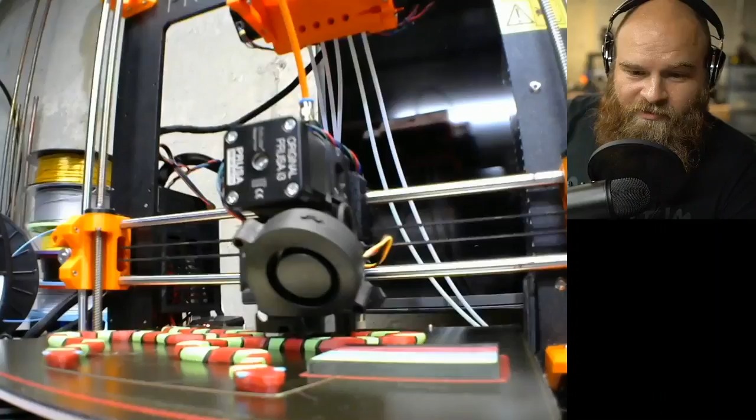So like, I want to be able to transition. I don't know if that pops up, but I just hit a transition and I got a camera on the MMU2, so we can take a look at what's going on over there.

And I got my little mini camera of myself. Let me watch that live. Hopefully my volume is turned off because I don't want to hear myself in this cycle. So let's wait for my internet to catch up here. Oh, it's working? Sweet. And was the transition okay?

I can't, OBS does not show me the transitions whatsoever. So when I click transition, it just is a cut. But I have a fade set, so hopefully it faded. That would be amazing if it did. Ah, sweet, it was smooth. Sweet. So let me go back to just me.

Rogue Dude, I can't wait for my actual one that I ordered. That way I don't have to just keep testing it. I feel with the one that I got for beta testing, I just have to continue testing. So I haven't really printed anything for fun. So I'm just testing different filaments to see which ones work the best.

I still need to raise my laptop or lower the camera so I'm looking at the camera more. I hate staring at my monitor because there's no monitor arm. You know, that's what I'll get. I'll pick up a monitor arm. That way...

Yeah, October, dude, that's next month. That's Halloween. That's a month away from my birthday. So I like October, mostly because Halloween. I'm a huge Halloween junkie.

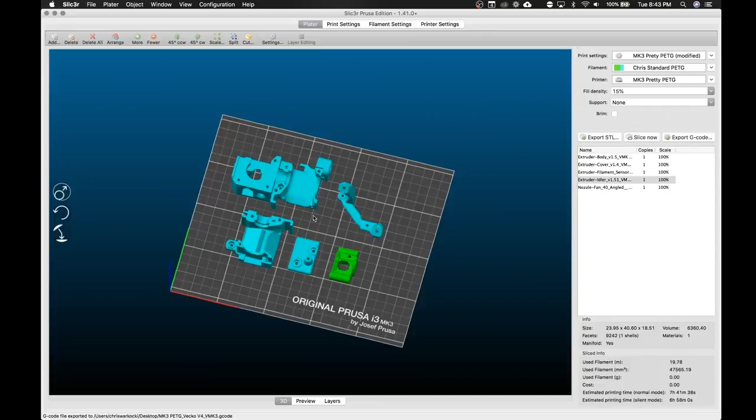Can everyone see Slic3r right now? Of course I can't see chat. Ugh, the things that happen.

I just finished slicing. These are some new Vecko parts. Do I have the new Vecko, or do we have to go on...

Oh man, so I guess I got to go here, and I got to go to Facebook, and pull up my chat with Vecko. Y'all get to follow along as I... did I get any notifications?

Let's see here. While I'm waiting, I need to learn how to convert STLs to 3MFs. So Bruce, if you pop in, you don't need to make them into 3MFs. 3MFs is just a format that allows you to save settings, which is awesome. That's something a lot of programs don't have. We'll go over that because that's actually really powerful for Slic3r.

But oh, that's what I was doing. I was gonna find my chat with Vecko. He sent me parts, Vecko. Hopefully nothing naughty is in this chat. So he made me this. I have to download. Thank you, Vecko, by the way.

Yeah, it can't be previewed. Download. Give me download, direct download. Okay, and I think I have everything else. Do I have the other Vecko files on here?

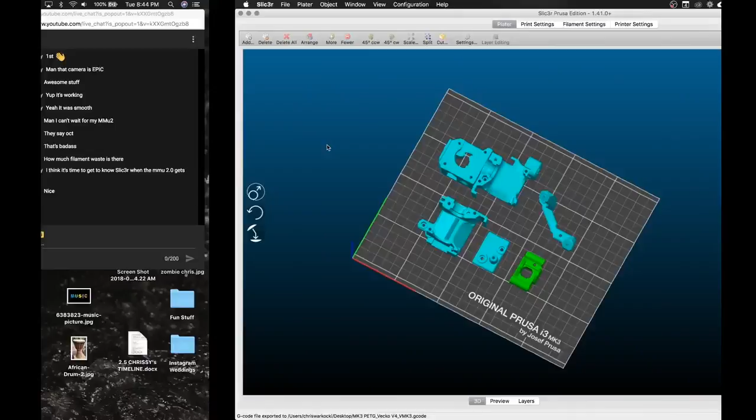Revised extruder and X carriage, yes I have that. So let's go back to Slic3r here real quick. I'm gonna check the chat. Yep, back. Get off that YouTube, get off that Facebook, Chris.

But I had to download those files. So let's delete this bed. I already have my PETG profile loaded. Oh, he sent it to me as a step file.

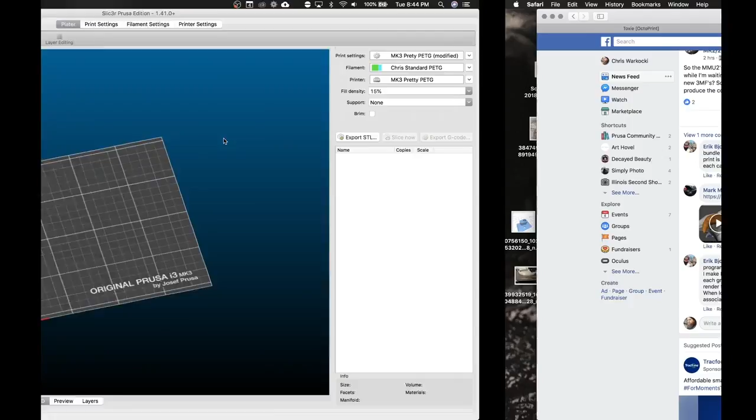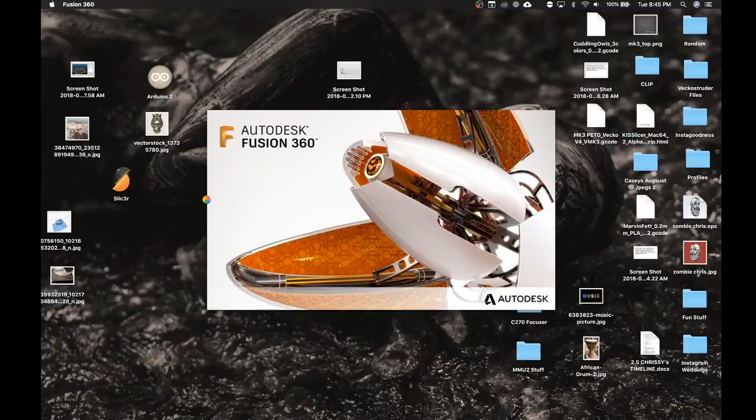Okay, let's open up Fusion 360. Oh, of course that doesn't work. Load Fusion 360. And let's do some stuff. Let's go Fusion, we're really going to do this slow. I'm going to show you how to convert a step into an STL, and then how to load that STL into Slic3r for no reason.

And I can't see chat right now, so if you're asking me questions, I apologize if I can't answer them. I will be adding an extra monitor to this setup here shortly. I'll run to Best Buy tomorrow and add a monitor to this, so that way I'm not running on...

Well, I guess I could put an iMac down here, that way I have a bigger screen. No, Chris, stop buying things you don't need. You don't need another computer down here. You just need to... let's see here.

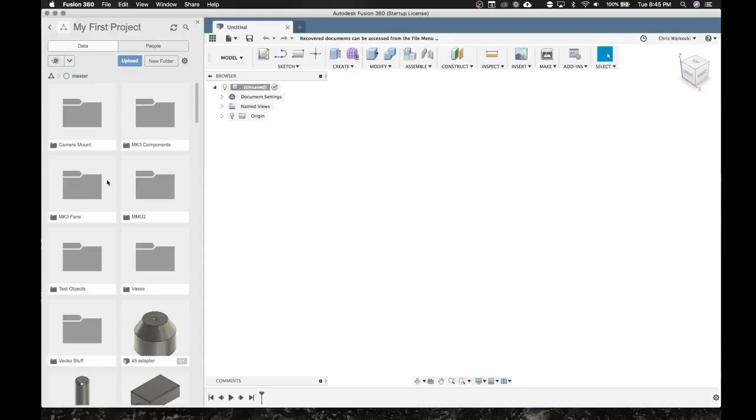Vecko stuff, so upload, select files. Hopefully I don't have anything naughty in my downloads. I don't. Let's see here. Extruder step. Open, upload.

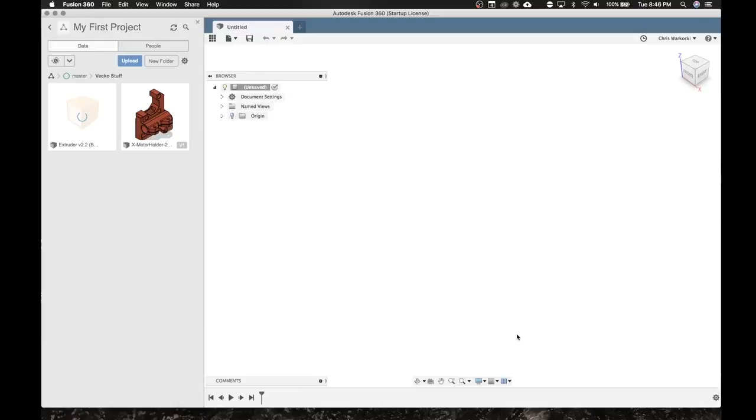And this takes just a quick second while it reads that step file. Go, step file, go.

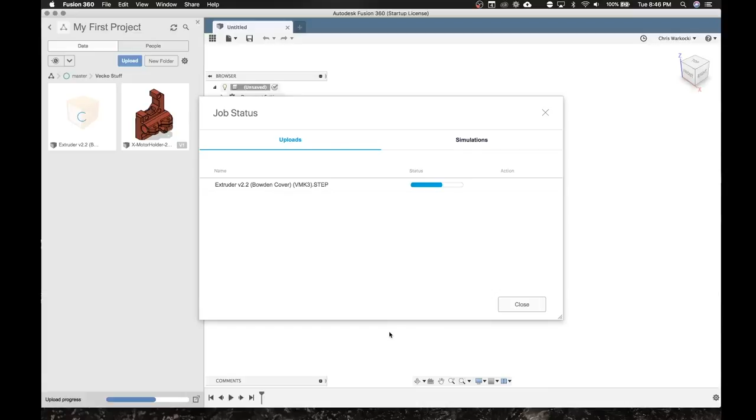I can actually, you know what, I can put an iPad down here, get a little monitor for that. Come on, why is this taking so long?

I'm gonna go look at the chat while that's doing that. Chat, oh man, no one's saying anything. Hi chat people, everyone's so intently watching my step conversion.

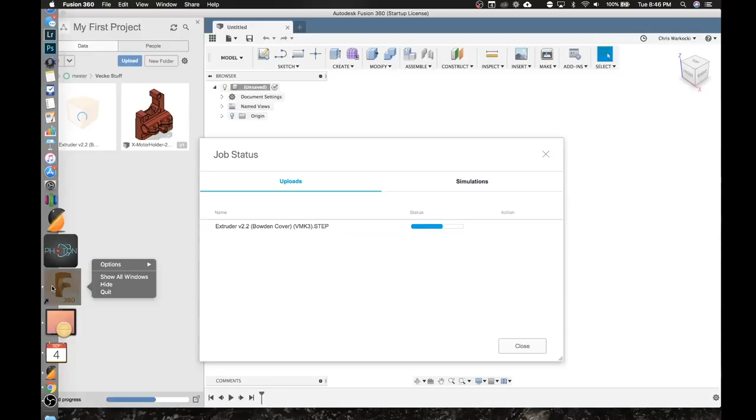What, are you crashing? Let me find out. Fusion, nope, hasn't crashed, just taking forever. Vecko, send me STLs bro. I'll load the rest in here.

So let's load the rest of the files I need in here. Revised carriage files, open in Finder. There we go, yep, come here.

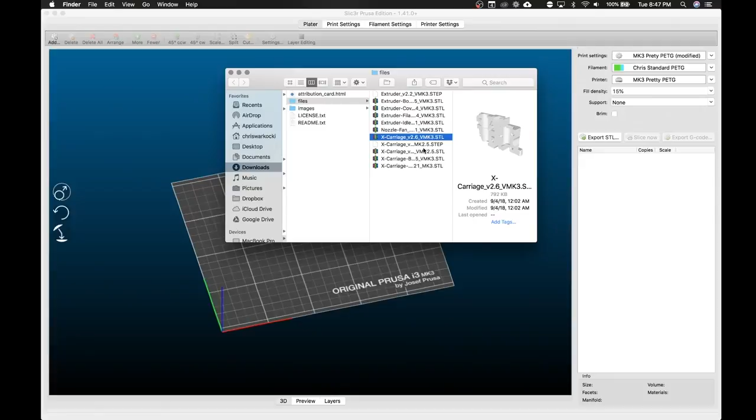So I need the carriage parts, I need to print these. So there's the carriage for the Mark III, and the back and the cable holder. I need those three, so this, and this. Drag that into here.

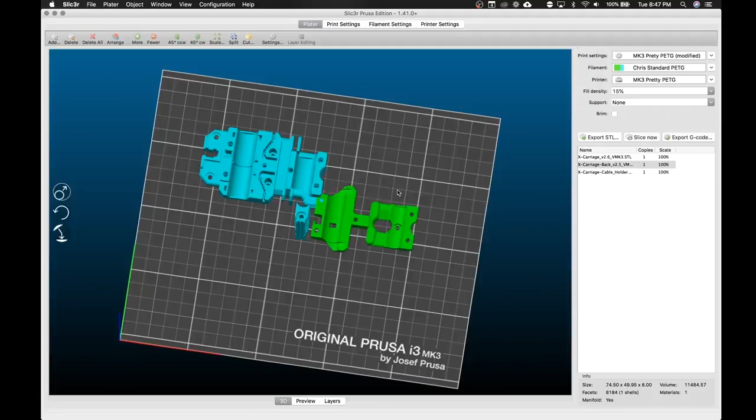Arrange, oh I love that they fixed arrange, it's no longer dumb. So I will do some changes though. By the way, the L and R keys are your rotate left and rotate right. L is left, R is right, in case you wanted to know which is which. I'll shove you over here.

Someone's texting me, my watch is going off. How's that? What is going on?

That step conversion is taking way too long. Is there an error with the step file? Extruder 2 step, open. Upload.

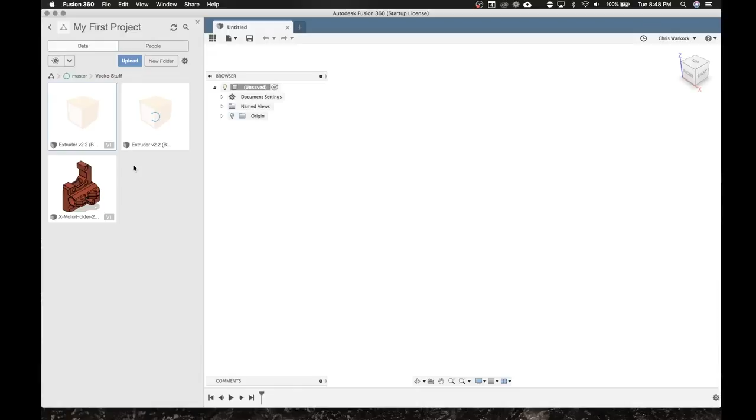No, that one stopped, that one finished. All right, let's see if it loaded. Opening document. And there's nothing here yet. It's probably mad at me because I'm loading too.

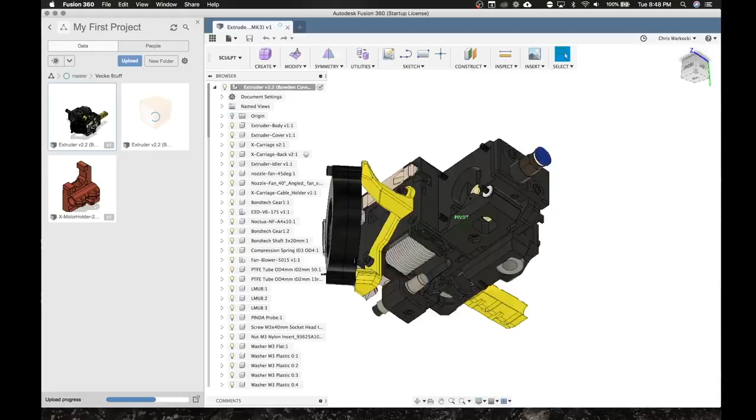You guys are probably laughing at me like, all right. Oh, that's why it took so long. This is the full, you didn't just send me the step for the thing, you sent me the step for the whole thing. By the way, Vecko is insane.

He does everything in SolidWorks. This is the entire thing in step, everything. He does, well, I don't see the motor, normally the motor's in here too, like it didn't load the motor. But this is what I want. Filament sensor cover, is that it? Yep, that's the one I want.

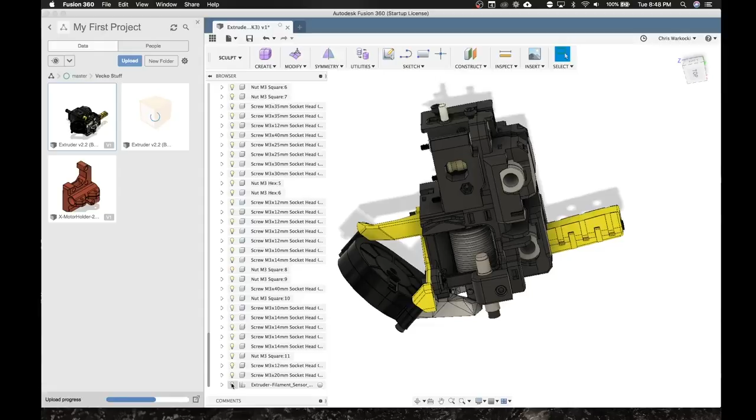And we're going to save as STL. Hit OK, and we're going to put that on the desktop. And we're going to hit save.

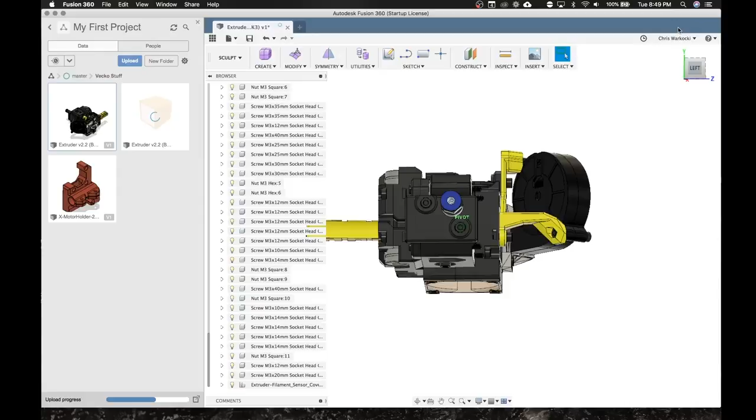There we go. Now we have Vecko's extruder cover with PTFE tube Festo. That way I can run reverse Bowden. Or what I'm going to be doing is I'm actually going to put his extruder on the MMU2 printer and try that out. Oh, this thing looks so cool.

Good job, Vecko. So let's go to the desktop. Drag this thing over. Come on, Sally. We're going to print a few of these. What? Oh, man.

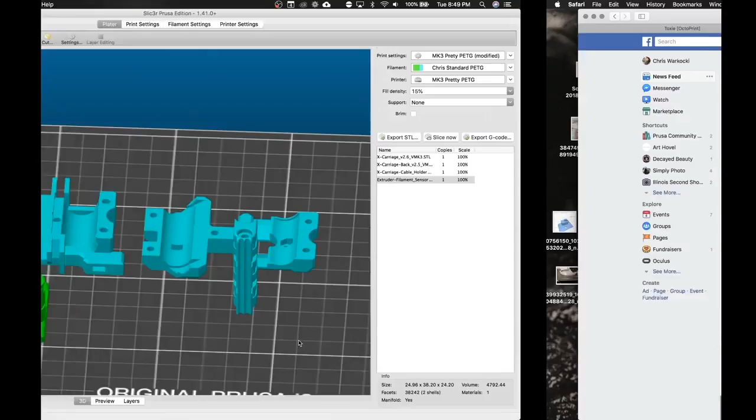Apparently I need to turn the Festo off. So there it is, I don't need the pneumatic coupling. So let's do that again.

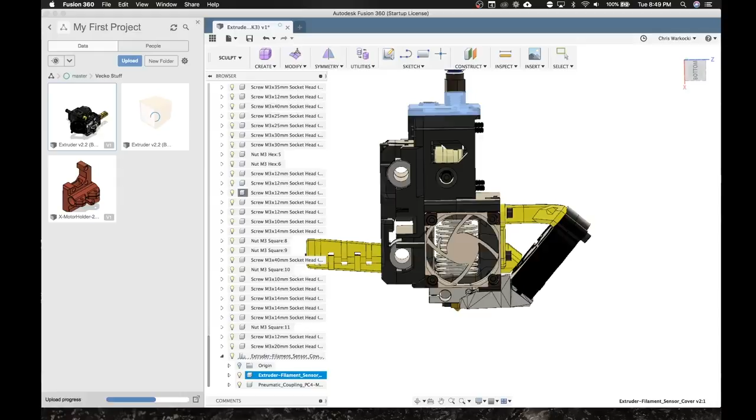Let's save as STL with not the pneumatic coupling attached. Hit OK, and we'll call that this. Save. The things you learn about Fusion 360 as you're YouTubing. By the way, this is why I never do a Fusion 360 tutorial, nor will you ever see me do one. I will need a couple of those.

So more, and I will double click these because we're going to change the layer height on these, because they do have - let's see - layers and perimeter, layer height. We're going to change this from the normal setting to 0.15 millimeters for layer height on these because they do have threads inside them.

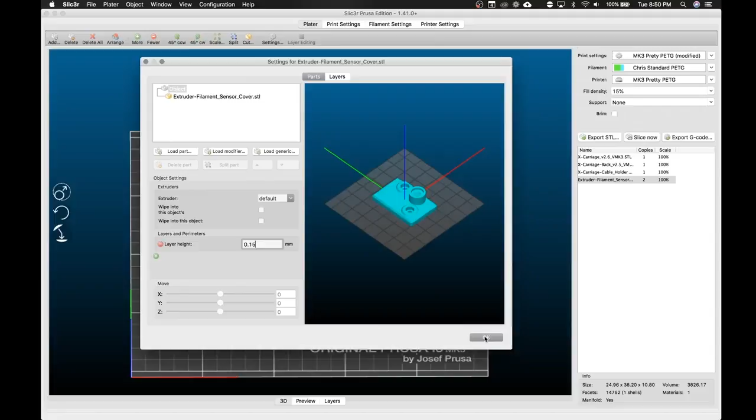Boom, and that is the powerful thing on Slicer. I bet you Tom's like freaking out over there, like 'what was that?' We're watching with interest.

These are - I just need to send something to the printer - these are upgrades. This is the newest Vecko extruder parts. I just printed the extruder, all the extruder parts minus the carriage, and then he made me these. I requested some with Festo holders, pneumatic couplings.

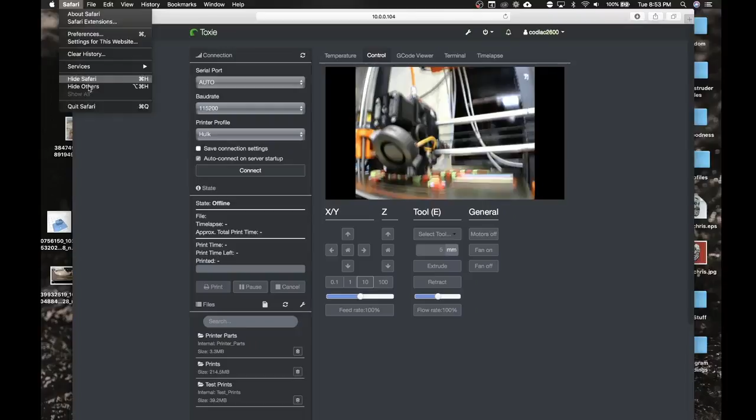But then you just watch the power - I can just change what layer height I want using multiple processes in Slicer. So just double click it and you can add all these cool functions, and I picked layers and picked layer height and changed the layer height from my PETG profiles at 0.2 millimeters, so now this is 0.15 here.

Yeah, OBS sometimes has a fit and it's weird. And yeah, India, if you think yours is atrocious, mine is definitely atrocious.

Let me switch back to me. Now you have to look at the screen of me. Yeah, I don't know why OBS does that sometimes on streams. I can run perfect as long as I'm not using screen sharing and stuff. My CPU load only went up to 15%, but it apparently didn't like it.

Yeah, okay, so we just sent a file over to print.

I try to have a magnificent beard. It's actually well unkempt - I normally have it trimmed very neat, and I'm normally wearing a t-shirt with my face on it, but that was yesterday.

The camera is a Sony A7R II that was my backup camera last year, and I replaced all my cameras with Sony A7 IIIs this year. So it's now the webcam, which is dumb - it's a nearly $3,000 webcam. But the nice thing is it's now going to be the basement camera for doing stuff.

But yeah, the more you use Fusion 360, the better it is. It definitely is. So let's switch, let's transition over here. The A7 II is awesome. I had that too for a little bit.

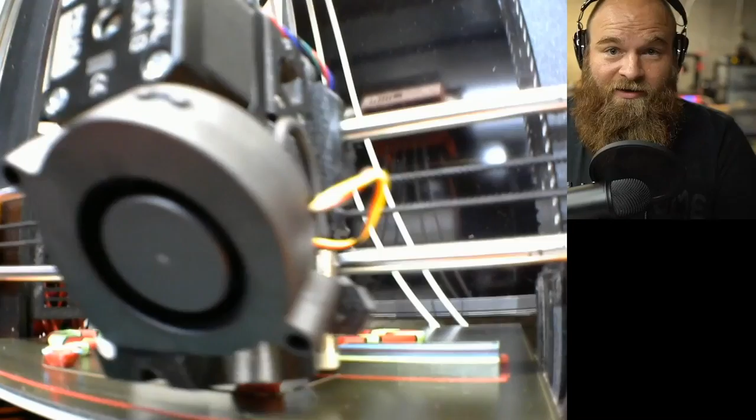Yeah, the feature's amazing for changing between focus, man, because if I move, it wants to focus on my eyes, which is great, even though I'm staring downward - which I apologize for, for not staring into the camera more often, it's still something I'm getting used to. All the Sony cameras should have it - well, the A7II had it, but not in live, it had face focus in still image but not in live. But the A7R2 and the A7III all have face focus, or eye focus, in continuous focusing mode, not constant. I'm a photographer, I should know these terms. It's the one thing I know more about than 3D printing, and I don't know that much about 3D printing.

So yeah, let's hop over to the slicer here. Let's delete the bed, let's delete all this stuff, and let's make sure I don't have any extra processes. Let's kill Fusion 360 just to see - oh yeah, it's going to ask me. Quit now, I don't care about uploading it, you'll upload it later. Make sure... yep, okay.

Loading a multicolor print is easy. Making them is harder.

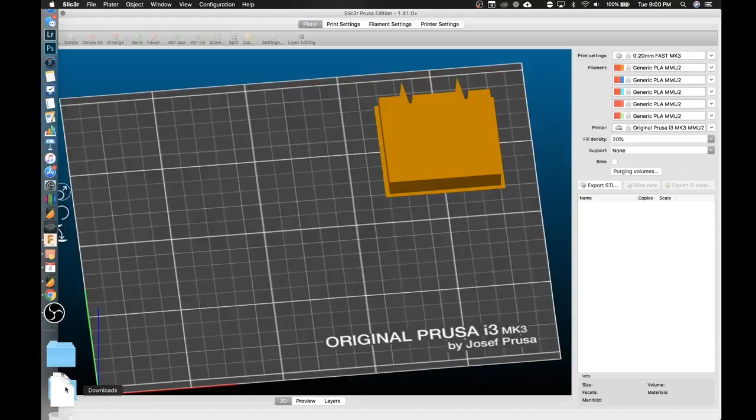Okay, so this is a fresh slicer. Nothing on the bed. Here's my purge block because I've picked an MMU2 profile. Everything's set to generic PLA.

There's one thing you need to check sometimes. There's a bug and they're working on fixing it. Yep, there it is - it didn't pick generic PLA. You go back, and this is going to be PETG, and you change it back to generic PLA, and now it works. I've reported this to the developers. They're working on fixing the fact that when you switch to generic PLA, whatever the last filament you had in the filament settings stays. Why that happens, they don't know yet, but they are working on it. The good news is bug fixes come fast.

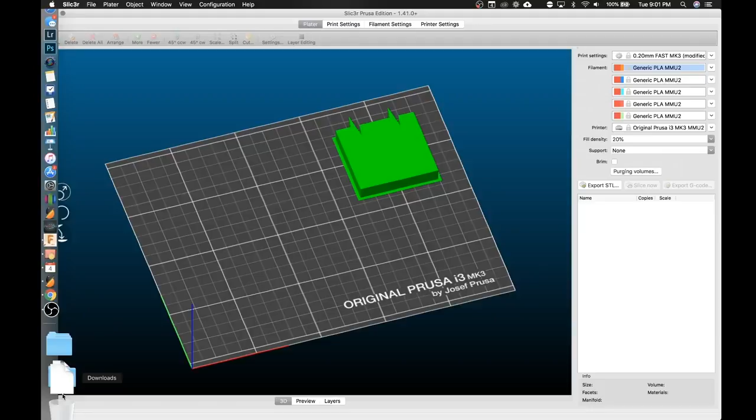So we need to... oh, I think I still have it open. Why do I keep closing the window?

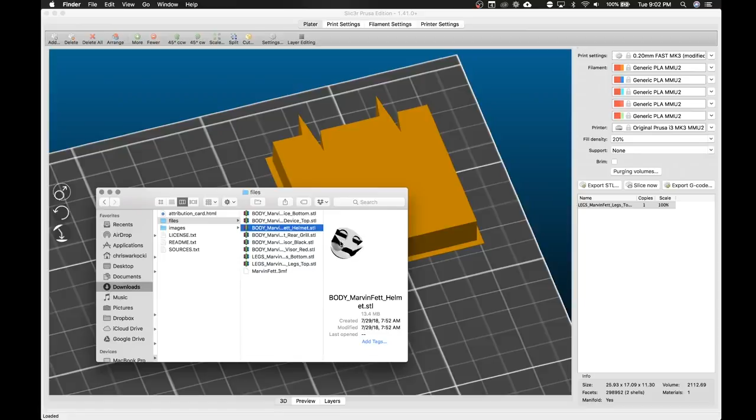So here are the Marvin Fett multi-material print pieces, and one piece doesn't matter - here's the leg's top, that's just a leg, it doesn't do anything. So we need to find what touches the base, and that's going to be the helmet. The helmet will touch the bed. You see the feet insert into the body, so we're going to move the head in there.

Actually, you know what, we can do it, it's set right. We'll double click the feet, and this will bring up our - I don't know what this menu is called, but this is where you do all of your mesh modifiers and multi-processes. So we're just going to call this the multi-menu because it does multi-things.

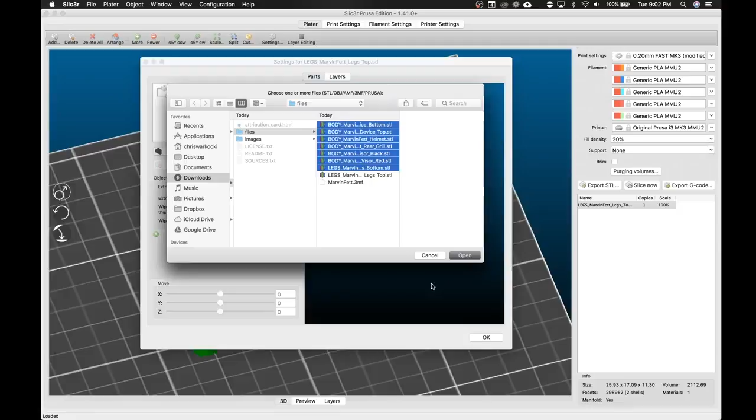So the next step is once you've got one piece of the multi-material print in, you go to load part, and you load all the other parts besides that. We're going to select all and open, and it should work - I haven't done this one. Nope, that was incorrect because it put the feet in its head, so that's actually going to be separate.

Delete all - this is where it gets tricky. I picked a good tricky one, see, you're catching me off guard. Let's see here - images, no not images, go back, files. Let's do the feet first, so we need the feet and the bottom feet. There they are, legs bottom.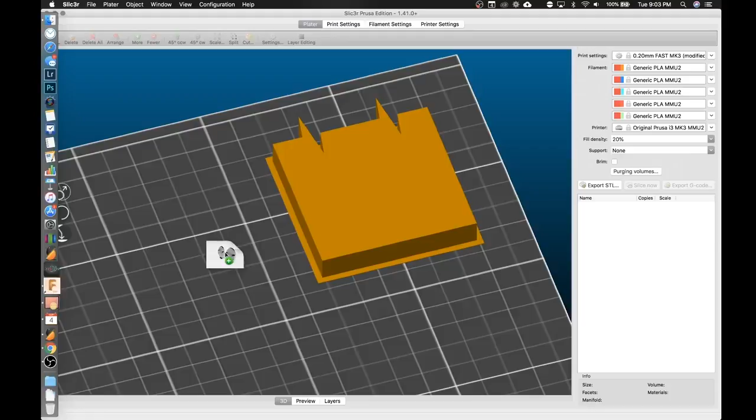Let's load the legs bottom. Let's load the other part of the leg bottom - load part. And legs top, we're going to load that. This combines them automatically, so it finds where it needs to go. It combines them automatically, and we'll come back to this.

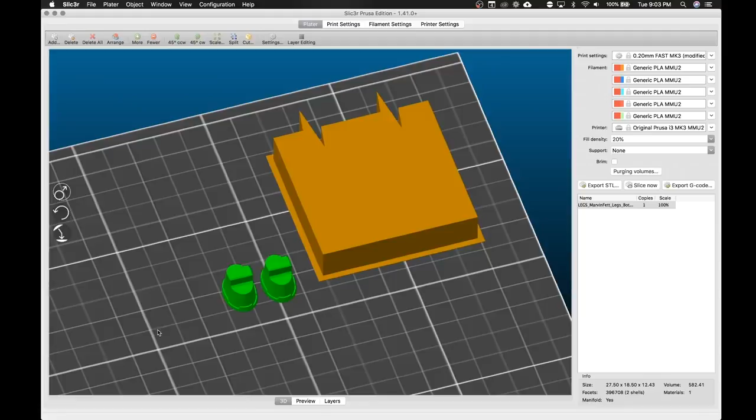So this can go over here. Let's load the rest of Marvin Fett - downloads. Oh, why do I keep doing that? I keep closing the window. I'm such a good computer user that I keep closing the gosh darned window. So let's pick the helmet.

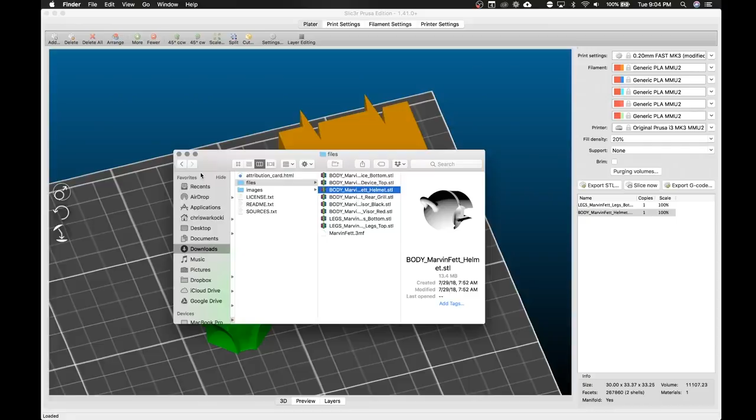We'll load the helmet. The reason this is there - there's actually two parts to this piece. You don't normally have to do this, but you need the pieces that touch the bed. Let's make sure the stream is still going - yep. Double click, and that brings up our multi-menu where we will load a part, we will load all of the other parts. So we don't need this one - we just need to load everything else besides the feet in that.

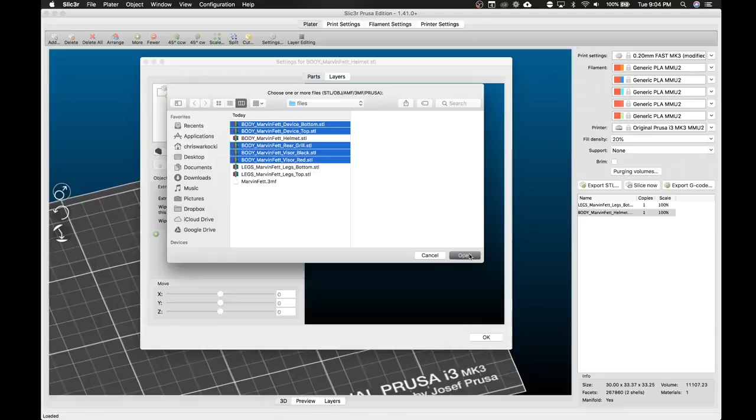So that is - we can remove this. Device bottom, device top, rear grill, the visor, and the other part of the visor. We're going to open, and it'll literally drop everything into place perfectly. So there is our helmet section of our Marvin Fett.

You could load it all as one, and it should combine the two, but it prints without supports split like this, in case anyone is asking that question. And now you're wondering, like, oh, well, how do I make it multicolor?

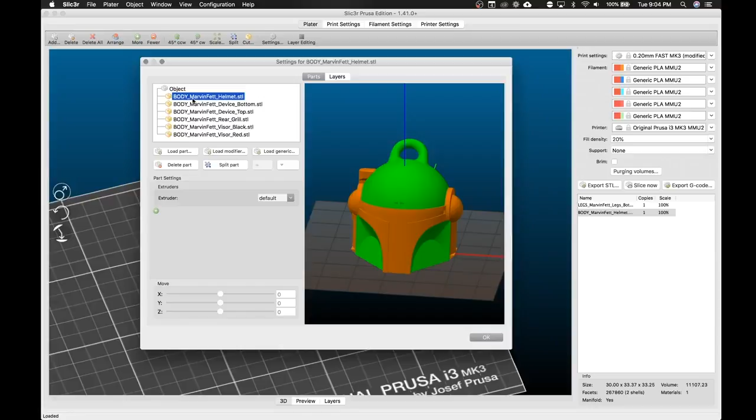It does a really cool thing in that you can select each piece that you dropped in. So these are all the different pieces, and they highlight green - as you can see, whatever you highlight highlights green. So we're going to pick the helmet, that's the main color of the helmet. You have to know what colors are in your MMU2, so let's say color 1 is green - we're going to say color 1 green, and that's our helmet piece.

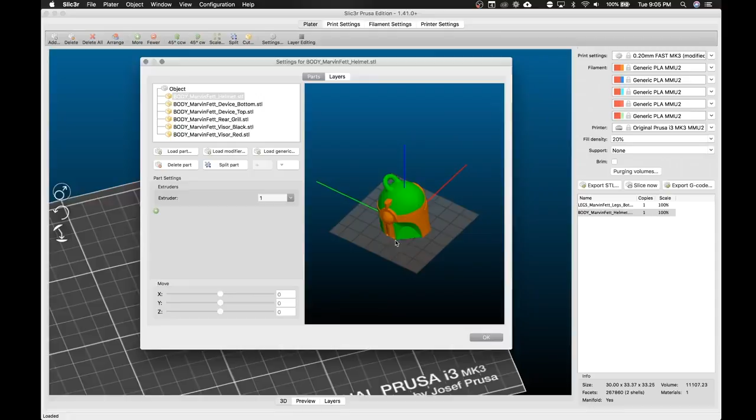We're going to go to the device bottom, which I believe is the bottom of this device here - nope, yep, down here. So this is the device bottom, and the device top is this little section. That's usually silver - let's say silver's on 4. Someone's messaging me - Jason, nope, okay. So we'll say silver's on 4, pick the wrong thing. Device top will be 4, device bottom will be 4, those will both be silver. Why they're silver, I don't know, we're just saying they're silver.

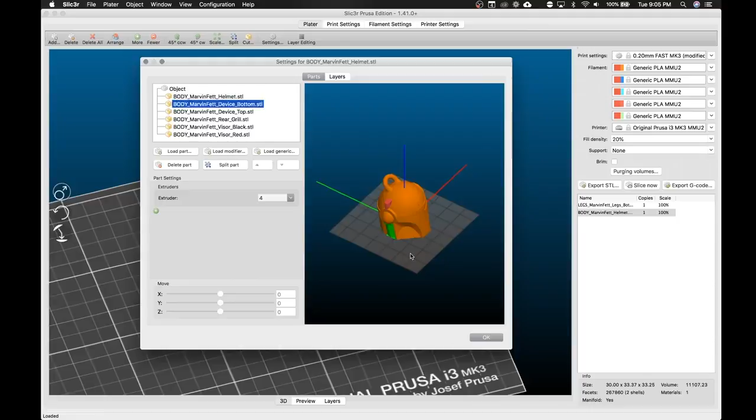And as you see, it assigned it a color, so now it's pink in there. The helmet stayed orange because that's color 1. So we need to go to the grill.

And I don't know where that is. Where's the grill? There's a grill? Somewhere in here is a grill. It's telling me there's a grill hidden in here somewhere, and it should be highlighted. Oh, there it is back here.

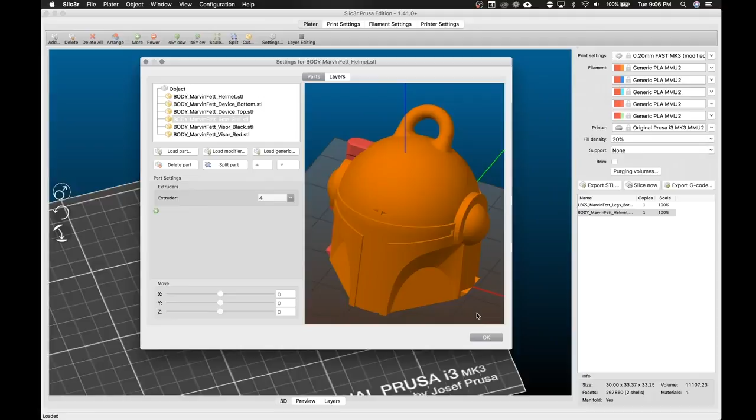So those things are another color. We'll say that's our black. So that's going to be black.

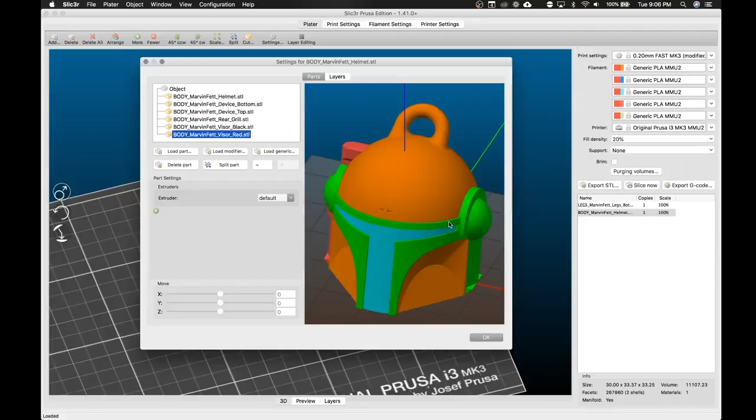And the visor is highlighted. That also has to be black. So we said that 3 was black, so this will be black. And then the red part of the visor, which is that outline, it says it should be red. And of course we put red on 2.

So helmet green was on 1, and the device bottom was silver, and the top was silver, which are both 4. 3 is our color black, which is also there, and 2, which is our red.

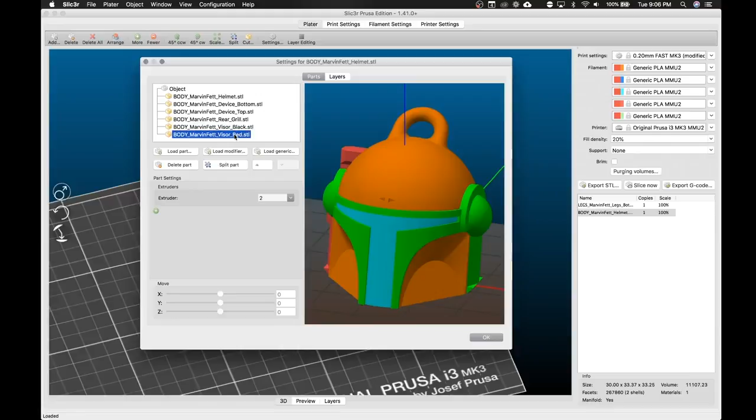And that is how you get the colors in. You literally just sit there, and you have to just remember 1, 2, 3, 4, 5, what colors they are. You could do a little bit more work. I wish there was a way to hook up all of the colors, so you didn't have to try to remember them, but this is how it works.

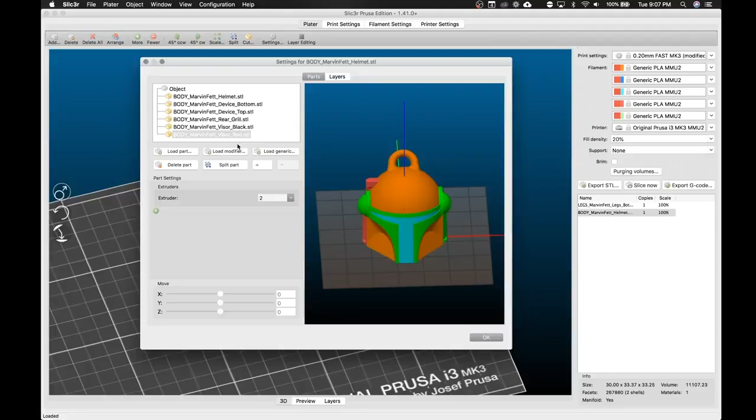Now you're probably asking me, what about if I want to wipe into the object? Well, here it is. Select the object, and there is 'wipe into this object.' By the way, I've also reported this to the men in charge and or women. On the Mac version, it says 'wipe into this objects.' They are going to change that to something more appropriate, like 'wipe into object.' And they will change this one that says 'wipe into this object' to 'wipe object' or something like that.

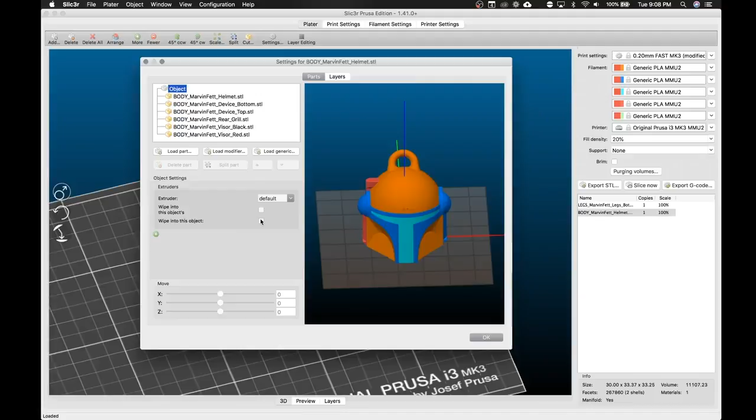So that makes it a waste object. That's the second option, so wiping into this object means that the infill will be used as wipe. And on the Mac, 'wipe into this object' just means that the object itself is going to be a waste object, so you'll have multicolor. It just prints whatever color and purges right into it. We will select neither of those because this is a small object and you're not going to get enough purge out of it. And there we go.

And then we have to do our feet. So let's double click the feet. Let's say the bottom of the feet are silver, which I think we said was 4. Oh yeah, I made the whole thing 4. Aha, the bottom of the feet is 4, and then green for the legs, which we said was, I don't remember, 2.

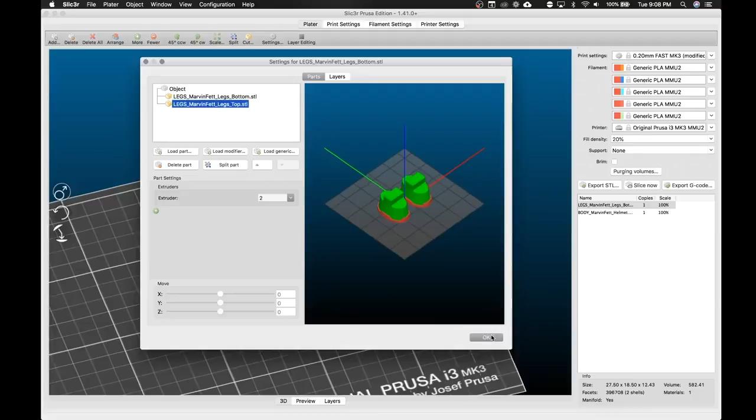That wasn't green, but that's okay. So this is how you get the multi-material print set up. Now you can see it actually shows you the multicolors on there.

You can actually change those. So if you go to your filament settings, printer settings, extruder 1. Let's say extruder 1 - I don't remember what we said extruder 1 was going to be. I think we said that was going to be...

You can change them to whatever you want. Extruder 4, I remember, was silver, so we just got to turn that one gray. So you can actually go in here and take a quick look at what it'll look like finished.

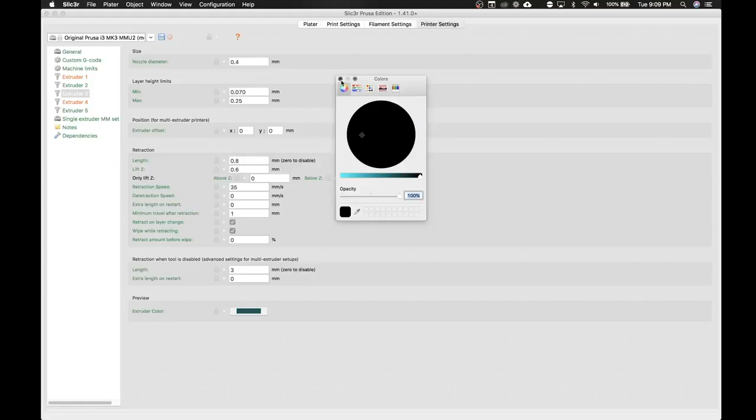I don't think we used 5. 3, I think, was black. Could be wrong, probably am. 2, I think, was actually blue. So yeah, nope. One of them was the green, and I think that was 1. Maybe that was 1. Cancel.

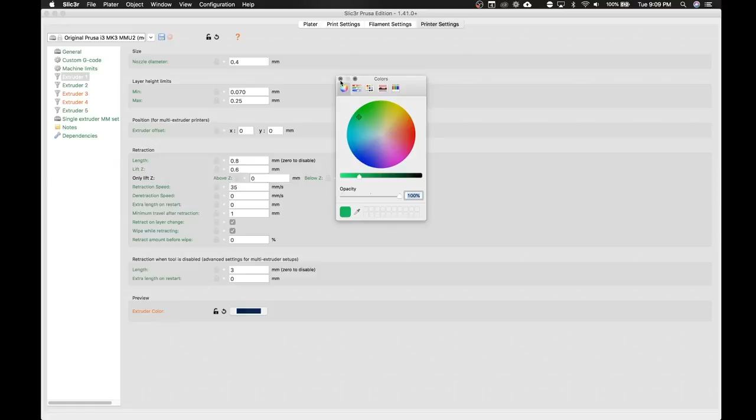So printer settings, extruder 1 is green. I'll make it a dark green. So yeah, there's your Boba Fett Marvin.

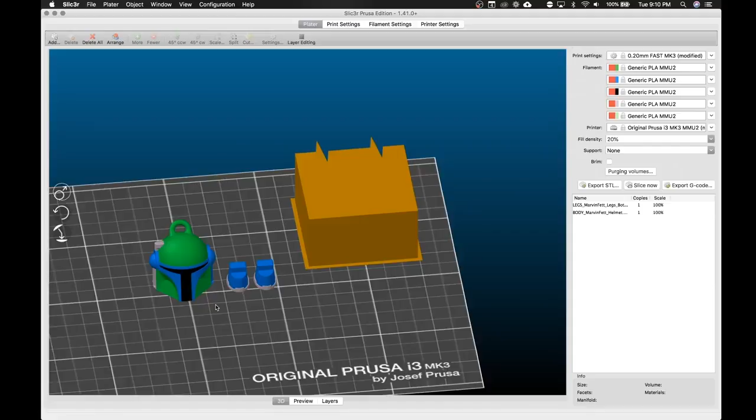And you can just kind of use that to see what the colors would look like. They will stay if you save them as such, but they default back to their primary colors. I wish orange wasn't the main primary color, but hey, I did not choose what the primary color is. And of course, here, if you want more, you can just add more.

So now you can have 3 of them and 3 feet. And you can move them around as you please, so you don't have to just have 1 Marvin Fett head - you can have 3 Marvin Fetts.

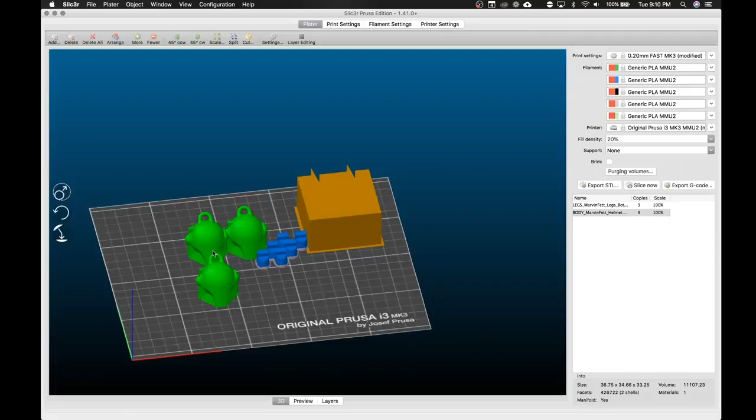Keychains. You can place these however you want. You could use auto arrange, though sometimes it moves the wipe tower oddly. So they are still working on that, but at least I think they are.

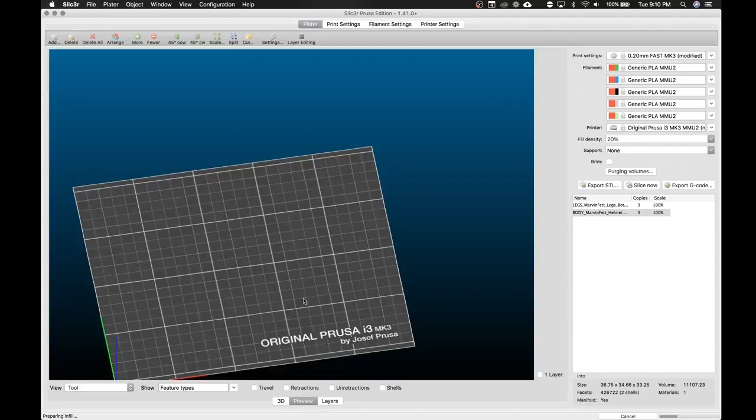And then, of course, we can slice it. This might take a little bit—I should have probably not made so many of them. Slicing multi-material definitely takes a little bit longer than standard slicing.

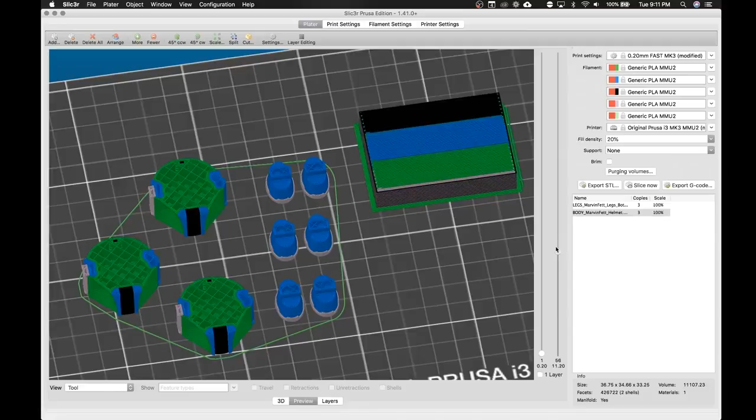But this will give you a 1-to-1 preview of your purge block, which is amazing. So this is your actual purge block with the colors in there, and you can actually see how dense that's going to be. Since we're changing a color every single layer, and we have 3 colors at one time, it is a very dense block. And then when it switches to less colors, we'll have some gap, some air gap in there. That's a very dense block.

But that is the basics. Now, someone did ask about 3MF files. Let me hop over to the chat real quick and see where we're at here.

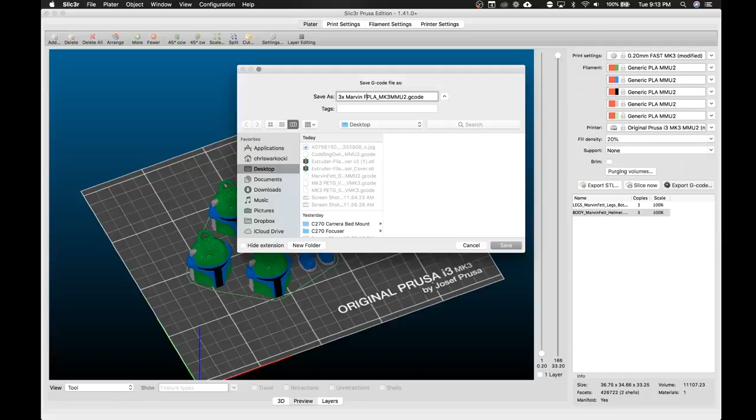So one of the things people asked was the 3MF format, and this is the best way to save anything. If you are going to do MMU prints, you can export G-code, or you can save it as—what I like to do, which is really hard to do, is I like to say how many, so '3x Marvin Fett,' and this is a 4-color.

And save. That just kind of helps me when I'm looking back at the memory card. I think there is a way, there's tags for all of this. That's going to take 11 hours and 20 minutes. That is a long print. But it is 4 colors, and it's a lot of color changing.

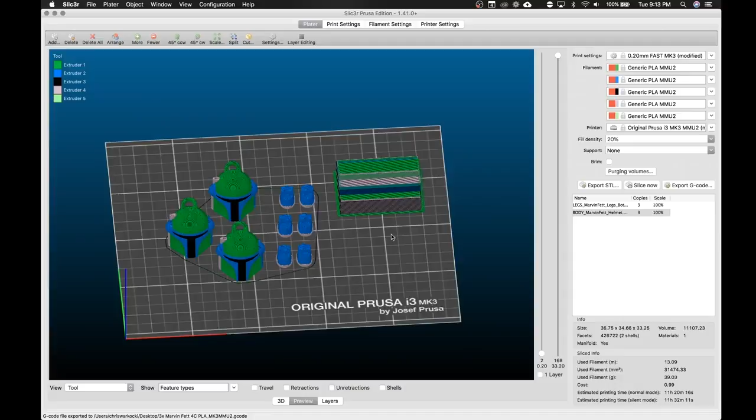It is changing 3 colors at all times, or more. 1, 2, 3, 4—it's changing 4 colors at all times. So that definitely slows things down. Most prints don't take that long; most of them are 6-7 hours.

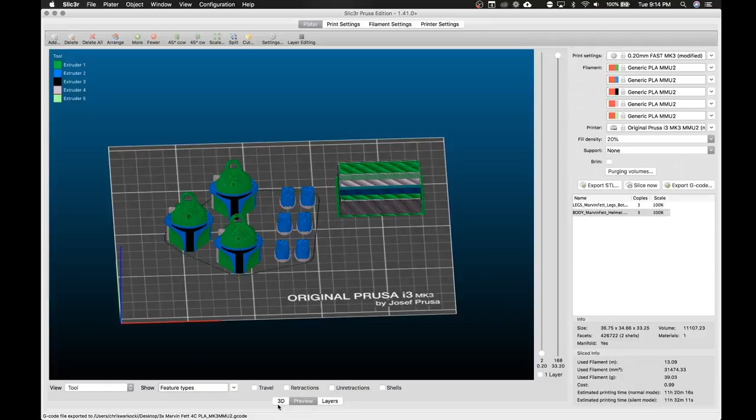But the 3MF format—there is a Plater, export the plate as 3MF, and all that does is it saves exactly what's on the bed. So if you've already sliced all this, you already have all this put together. And the nice thing is you can move this stuff up in the preview.

But you can go to Plater, you can export plate as 3MF, and all it does is it saves all of the information—so it saves all of what you've programmed in as your colors and your settings. And again, you can name it the same thing, so: Desktop, '3x Marvin MMU2.3MF,' save.

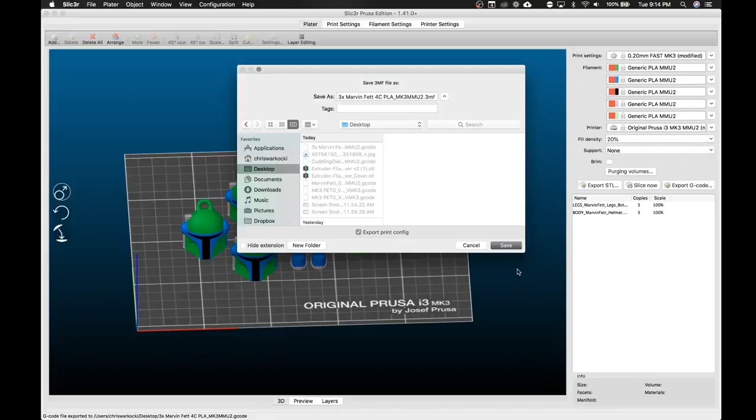And that takes a second because it's making this all amazing. And let's hit delete all. And we did all of that work, right, setting it up. And let's say we want to go back—we only want 1 Marvin Fett, or we want a plate of 5.

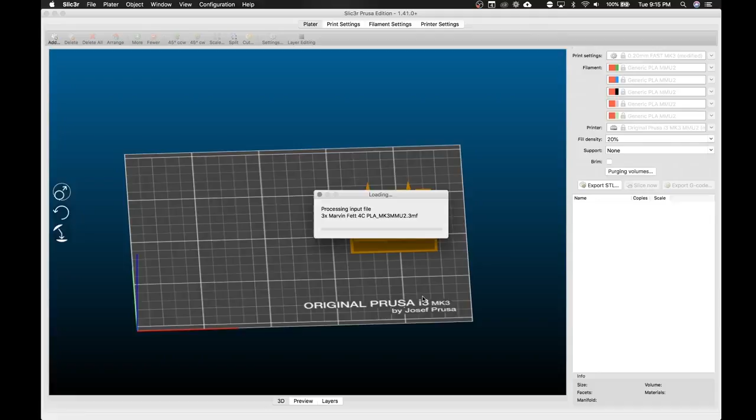If you go to File, Open, or you just drag and drop it, you can go to Desktop, get your 3MF file, and it'll load the 3MF, and all of that hard work that you did, color coding everything, is saved exactly in the locations you had them saved in. So you can go back in and make 2, make 1.

And this is the power of Slic3r right here, in that using that file format is perfect for multi-material. So I make sure that when I do these slicings, I also save a 3MF. And I believe it can print the 3MF—I'm probably wrong, but I know Slic3r handles 3MFs.

And in the long run, you can now save the bed—it saves all your settings, it actually saved its own print setting for it. But then you've got all these fun features here: you can go back and change things.

You can change the colors—like, oh man, I color swapped it wrong. So you can go in here and double click and go back and change your color settings. Like, oh, 4 wasn't silver, it was 5. So you can go back in and make 5 silver.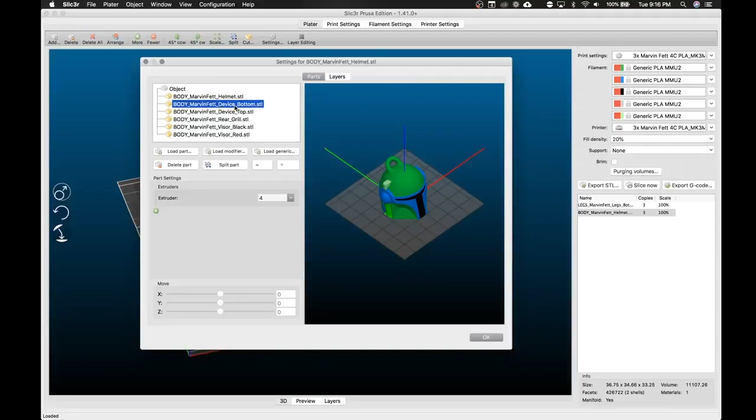Reslice and save. So that is your 3MF tutorial there. So let me go back to main camera and transition.

Is it better? Is it better again? Let's see. Yeah, so back to Indiana Zoidberg's point.

I think it hates the switching between stuff, so I'll figure out what that's about. But what Indiana Zoidberg is asking is he wishes Slic3r would give the time estimates before exporting, and it will. Bruce has already announced, and Joseph mentioned, that after the next major release, or during it, it's going to have time estimates before you export. They just have to calculate it all in, so at least it's coming.

Hopefully everyone learned stuff about 3MF format files. Hopefully that all got covered before I did stuff. Did all of my 3MF things pop up before it decided to kill the broadcast?

Let's see here. Yeah, S3D is awesome, and it will not work with the MMU2 as far as I know. But if it were open source, it could definitely do whatever it wants to do.

The hissing is most likely a couple things. It's been raining nonstop for like a week, so my sump pump is going off constantly. And I also forgot to turn off the dehumidifier that's right behind this whole setup, so you're probably hearing that in the background too. Apologies for that on this one.

Yes, Filament Frenzy, you will. And what's funny is I think you might start liking Slic3r, because a lot of people talk about the power user aspect of Simplify 3D, and it is, but it's missing a whole bunch.

Oh yeah, it's when I talk, because I have all these things making noise in the background, and when I stop talking, the gate turns on, and it's built into the microphone. I can't turn that off. What I have to do is soundproof myself, and that will all go away. So I'll work on that.

I can probably help a little bit. Uno momento while I hit the mute button.

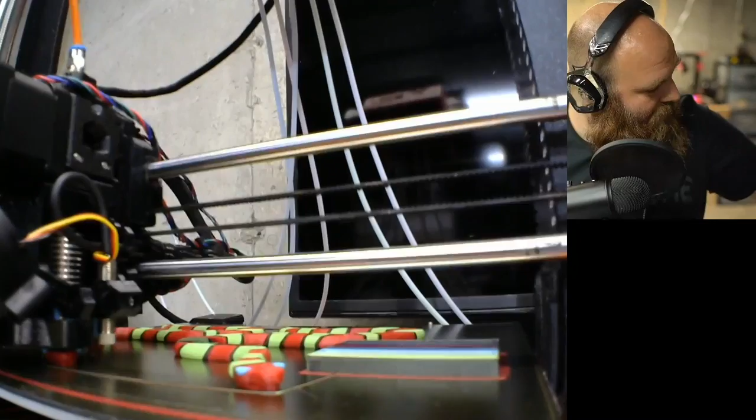Because I have a full rack of Push Plastic, I've got some Keene Village PLA, and I've got a full rack of Prusa PLA. Sorry, Tom, yeah, I know you've been wanting that Prusa PLA, man. I got a full rack down here now, so one full shelf of Prusa PLA. Anything else that I added?

That should be it. I am going to add more filament colors or filament brands. I just need to keep printing them to make sure they work, because they might work once and then the next time they don't.

So, Filament Frenzy—Mr. Tom, you asked if you can print the outline perimeter in one material and infill in another. You can actually do that in Slic3r without needing the multi-material unit, as a multi-process. I mean, you'd still need the multi-material unit.

Fun secret about Prusament filament: they will have a website, and there's a QR code on your filament spool. You scan that QR code, and it'll give you the exact dimensions of your filament over the entire length. So wait till that launches, you sons of guns. And it's only like $24 a roll, and it's gorgeous.

Post some prices of the different brands. Yeah, I will definitely attach the price. Most of the stuff I'm trying to print is within the $20-$25 range. I do need to order some Inland, I haven't had that in a while. I know that's popular. I don't really want to, but I'll order some Amazon Basics.

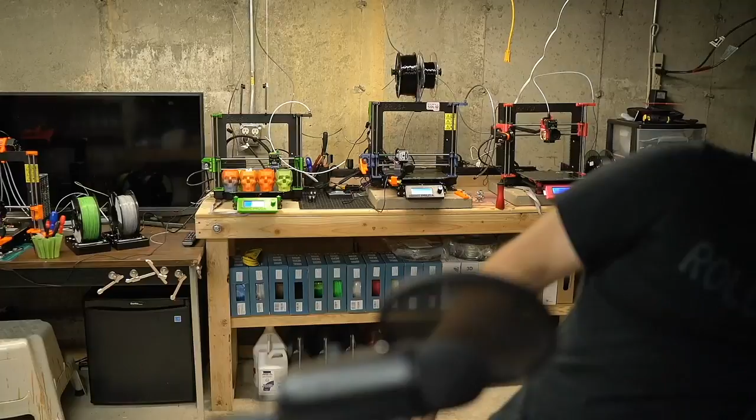Oh, they're over here. See? The new Veko part. Focus, get my eye out of the camera. So, single—oh, see, my eyes came back. Let me hide my eyes, it'll be annoying, it thinks it's still my face. Get in there, I'll hide it. Nope, but this is fine.

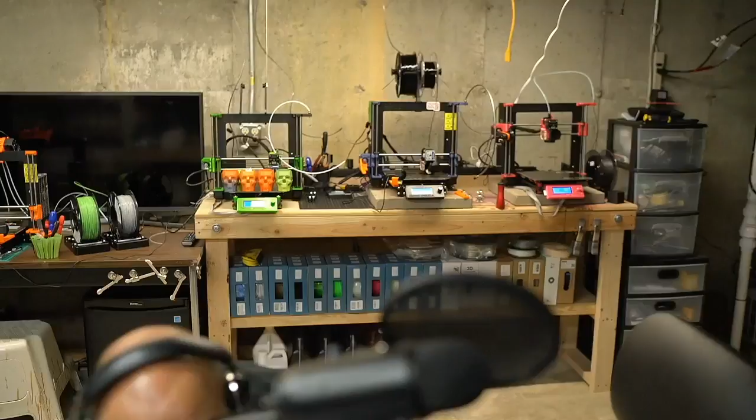Just throw that on the ground. But yeah, it has one... let me grab it, I'm going to grab it off the ground. There's a lot of filament boxes back there. That's a whole row of 3D Solutech and all my weird Chinese brands.

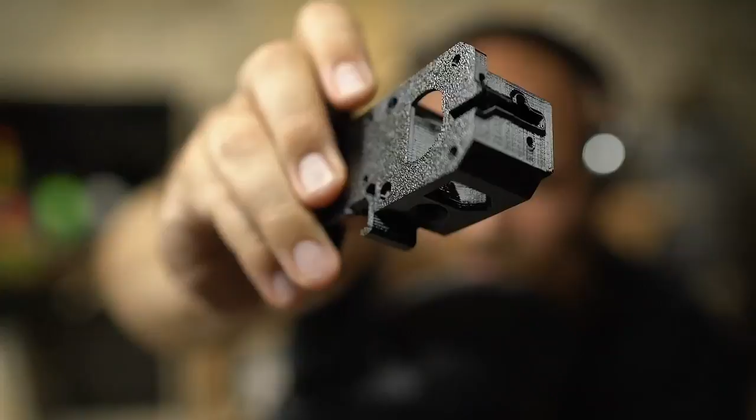So it has a new... let's see here, where do you want to focus at? There we go. There's a new lid on top, and that helps stray light from not entering the filament sensor chamber. It also has one screw mount, that way it's tensioned properly—you don't have it untensioning incorrectly. And what else did it do? Nothing on this one.

How many rolls? Okay, let's do a quick count for Tom here. 5, 50, 55, 60, 85... it looks to be about 123 rolls of filament in here.

Now, not all of them are full, but some of them might be very low. But the next part on the Veko extruder is this little guy. Focus, there we go—oop, get my face out of there and do this. There's this little tab here, and that holds the wire for the...

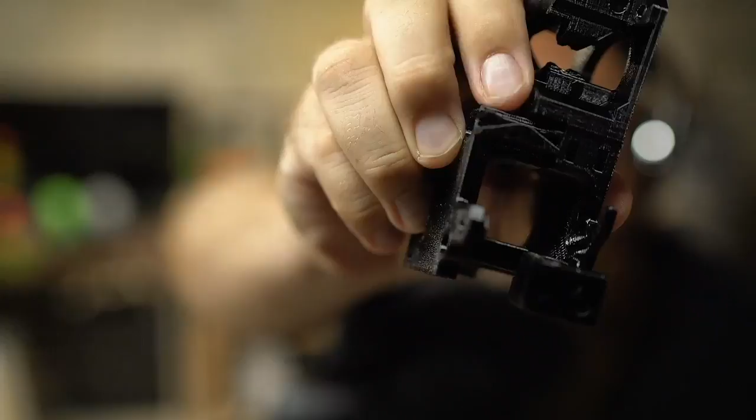Filament, Mr. Tom, all of the parts are available on Thingiverse, including the step files. He is an open source maniac, so all of the things are in step. But yeah, the link to it is on the main page, but also on Thingiverse. If you need a link, I'll send it to you on your Twitter DM.

The lid has the matching hand—focus on hand, there we go. The lid has the matching, I'll have to get us another camera just for close-ups. It has the matching little inlet, so that way light does not penetrate into the filament chamber, to make it more reliable.

And the way better bracket for holding the fan. So it looks weird, but it does hold the fan. That's basically it. The X carriage has some changes too. Yeah, Veko stuff is ridiculous—the dude does everything in SolidWorks, which just confuses me. I can't even figure out Fusion 360.

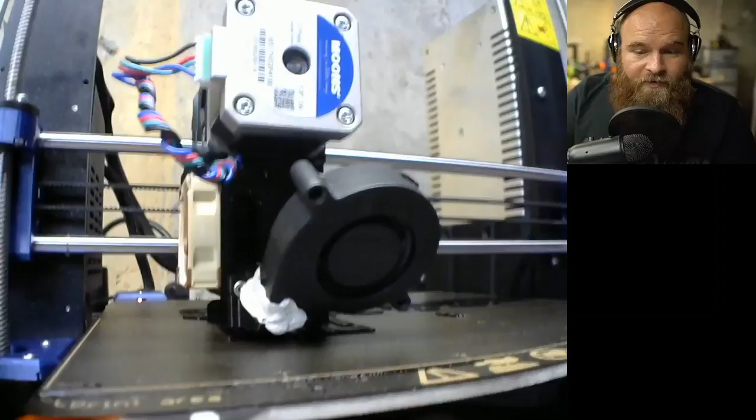Boom. And then let's put my face on that one too. So video capture. This one, okay. This. And put that behind. Look at that. And transition. So yeah, there's the texture bed.

So Jeff ordered an MMU1 to MMU2 upgrade kit, which is awesome. So yeah, there's the bed mount. And probably people are going to ask me, like, what is that gunk on my fan? So I don't use anything to attach the fan because I'm always repairing and swapping it. Removing extra screws isn't fun. So I just use sticky tack to attach my fan. It also helps block the air because there's a little gap there, keeps the air there.

Yeah, it didn't blow up. I think it's just Slicer, man. Doesn't like, every time I swap back from Slicer, it's like, ha, fail.

Yeah, Shane, is there a different timeline for upgrades? Tell us now, I'm waiting intently. He's probably answering someone's question. And they're probably calling him a jerk because they're not giving it to him for free.

All right, let's go back to main plus MMU2. Oh, why'd that mess up? Dun, dun, dun, dun, dun. OBS, you're so fun when you work. Boom. Transition? Okay.

Yeah, dude, 3D Board Gamer, custom supports are meant to be launched in the next major update. So, coming soon to a slicer near you.

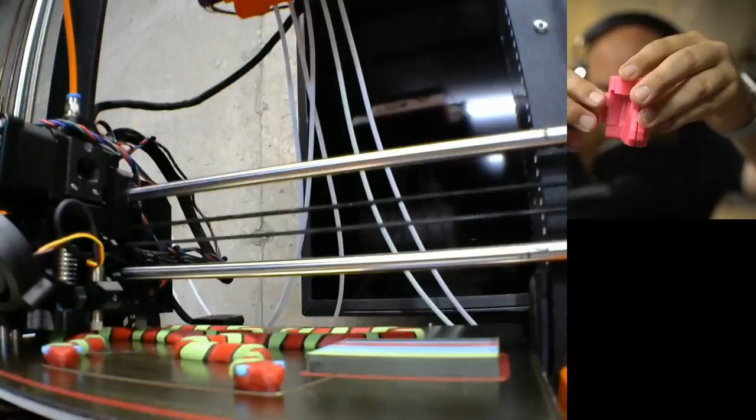What you want is one of the Zaribo X-axis parts. They have this belt tensioner that's built into the X-axis, so that goes in and it can tension quite a bit. I think it's over 5 millimeters—4 or 5 millimeters that it can do for the X-axis, which is way better than the 1.8 millimeters that the Prusa one can do. So, poopy on you, Prusa.

And the Y-axis, that one's easy. Just loosen and remove the smooth idler, the 2 screws that hold the smooth idler holder from the frame, then move it 1 notch on the belt holder underneath, and reattach it. That should be more than enough.

So Jetto Black's asking, is there a tensioner you can use that doesn't involve changing the X carriage? And the answer is no, at the moment. The Zaribo one switched to a 16-tooth idler, which matches the idler size of the motor, which is 16T. You would have to go to a 20T to fit the stock setup, and I don't think that would fit. But you can always hope that someone does it—I think Arnaud is thinking about doing that mod. Let's see here.

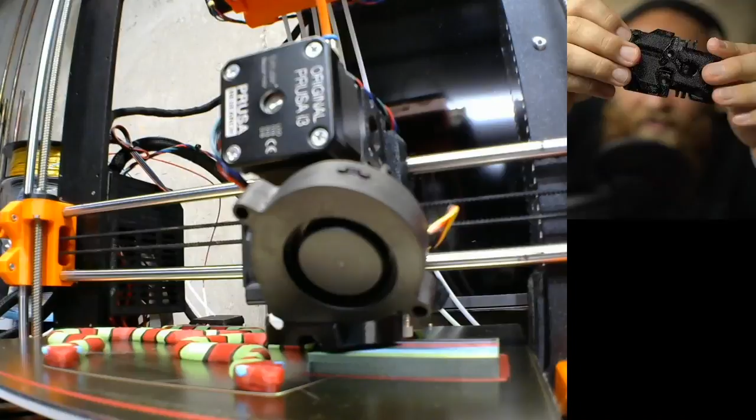Face focus is awesome until your face is still in the shot. So where the belts are on the Mark III normal one, you put the plate on—and I think I have it backwards. There we go. You put their plate on, you can still get to the belts. So that is the major perk on the Zaribo stuff: you can still access the belt, so if you ever need to remove it because it's frayed, you don't have to take the entire carriage apart.

So there's your other reason why you change the carriage. But there isn't any real big upgrades to that section. It does look pretty though. So it does look, of course, my face.

I'll work on a better setup for that. The other lens I had was a little bit better for close focus. This one does not focus that close, so it wants to continue focusing on my face. But you too could have beautiful parts.

Yeah, that's a Zaribo carriage. You do have to redo the wiring bundle, and I switched to something Amazon sells, a wrap. Prusa switched it to the quick wrap—it's got a slit in it. You can unslit it and run all the cables into it, so you don't have to feed them through the cable wrap. I guess I'll grab that too. Hold on.